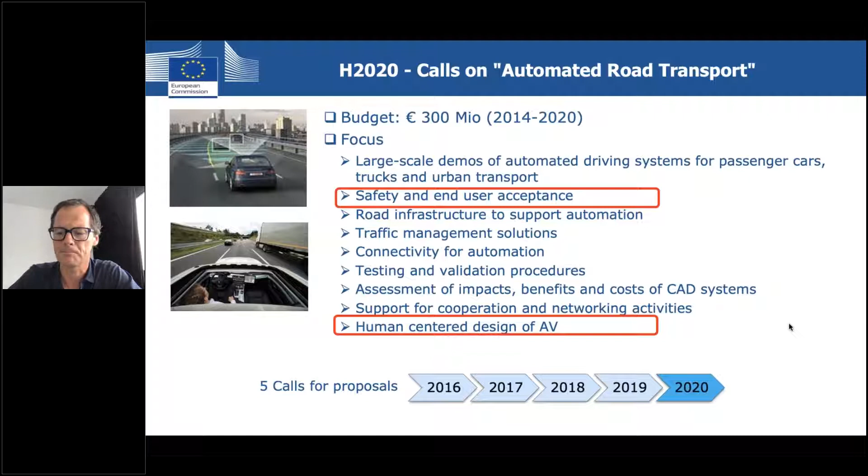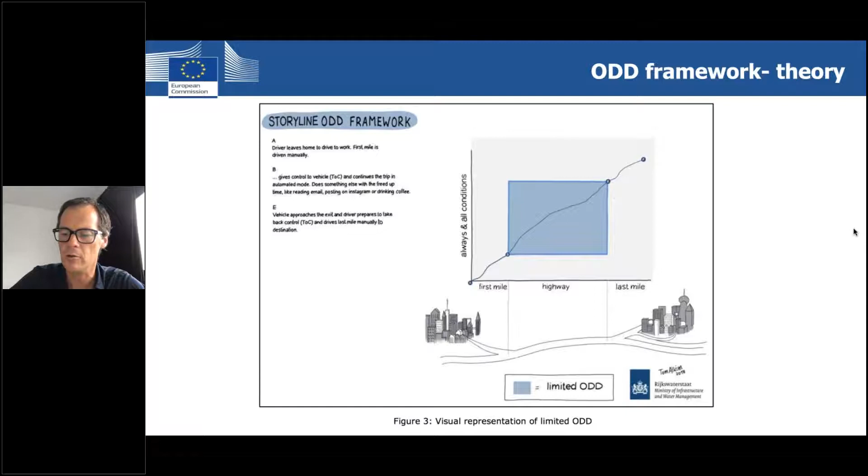Then at the end of the operational design domain, the driver takes over again and drives manually to its destination. Now of course this is very nice in theory, but we all know what happens in practice. I have many videos showing what can go wrong, and you must have experienced that yourself with testing. There are many instances in practice where things don't go as planned and the limits of the operational design domain are reached.

These are often related to infrastructure elements, to mixed traffic and other traffic on the road, and to adverse weather conditions, for instance. And I think it is a joint task for all the stakeholders to try and solve this in such a way that we try to optimize the operational design domain.

However, we cannot make all these gaps disappear. So we should also really focus on the transitions of control into and outside of the operational design domain. And I think if you look in relation to interACT, gaps related to dealing with other traffic is an important task. Another one is also the vehicle behavior when it is inside the operational design domain.

Because automated vehicles do behave quite differently from human-operated vehicles at the moment, at least that's how we envision this. And in the end, that should be a bit more harmonized. So I think we still have a long road ahead of us.

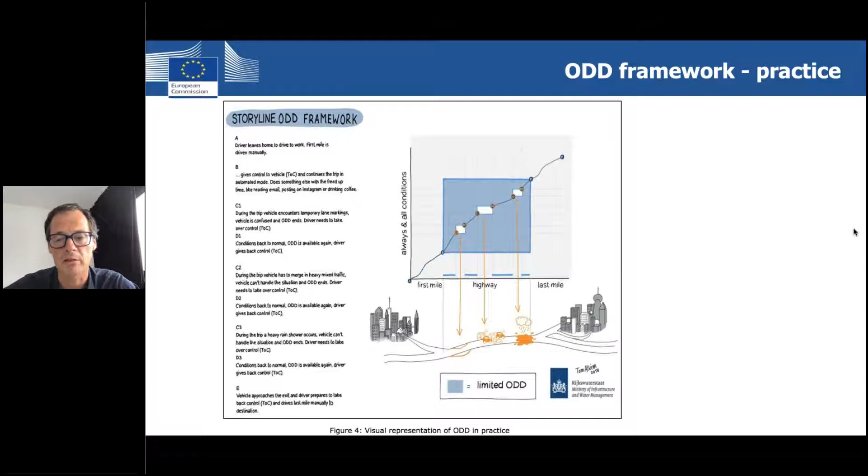I think you made some major steps in interACT, especially related to these mixed traffic challenges. And I would say that communication, whether it's implicit or explicit, really helps also in negotiating with other traffic and expanding the contextual awareness of automated vehicles. But I also think that for the coming years, we need much more research and developments in this phase.

So with that, I have come to the end of my presentation, and I don't know if there is time for some questions at the moment. I think I should - you have taken back control.

Good. Thank you, Tom. That was really nice to hear the European vision. And as a researcher, we are of course happy to hear that there's more research to do, I would say.

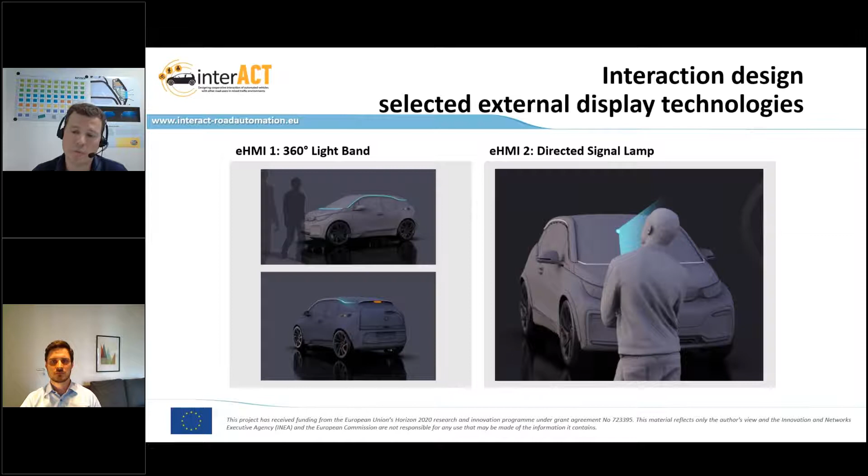The so-called directed signal lamp was a special research work and also a PhD work we did here at Hella, with the idea that we can send light signals to only one specific traffic participant. That's an interesting technical approach to realize a perception-based interaction strategy, just to send signals to the traffic participant to whom the message 'I have detected you' refers.

Going into detail regarding the 360-degree light band: one important thing was that we had a solution that fits the car body of the demonstrator vehicle. It was one of our main goals to have a fully integrated solution, and we reached this goal. We also dealt with a lot of technical questions about how this light band should look and what should be feasible.

One important question during the last years, not only in this project but also in other projects, consortia, and fora, was about the perfect light color, the color of choice. From month to month, year to year, we saw that something between blue and green is the color of choice. Sometimes you read the words cyan, blue-green, or turquoise as similar terms for the same color.

If you know the CIE color shoe, shown here on the right side, it's a small area, something between 490 and 500 nanometers we have to reach, to be out of the green and blue restricted areas. These areas are already restricted for vehicle and traffic lighting. So the idea is to get a saturated color in between these two colors, and that's something we have reached and implemented in this project.

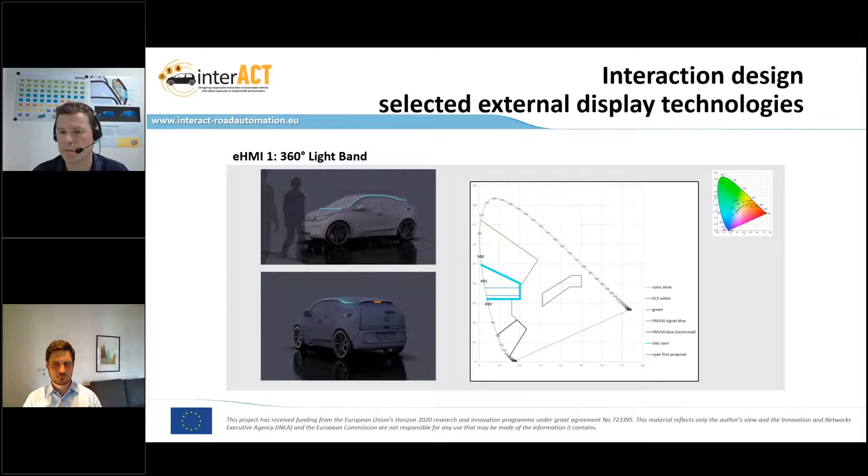One challenge, especially for this light band application, was to fit it into a vehicle's car body. We didn't build our own research platform; instead we took, as an example, a BMW i3S serial vehicle with a space frame structure. So we have the space frame as the bones of the vehicle, and the body parts on the outside as something like the skin.

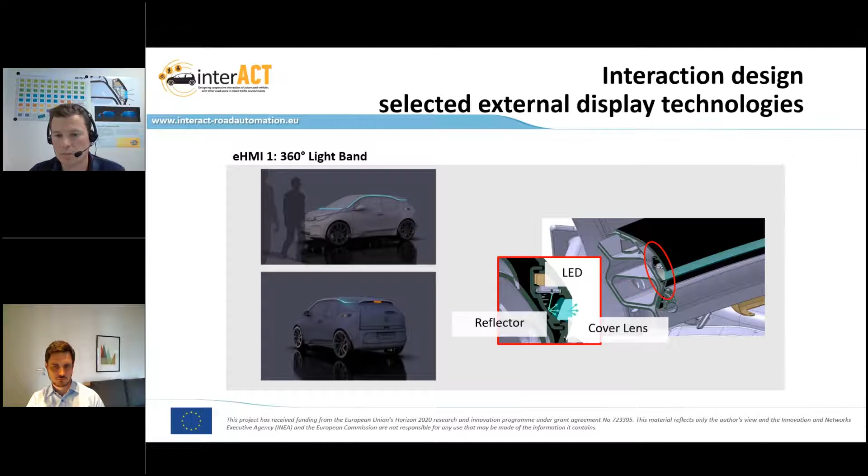It was a big challenge to implement this technology, because if you look at this center cut, you can see we have around 10 millimeters between the light source and the reflector, and 10 millimeters between the reflector and cover lens—quite a small system. We have more than 700 LEDs around the vehicle, all switchable individually, giving us the chance to realize animation and illuminate segments, while still achieving a very homogeneous appearance when all LEDs are switched on. This was one of the technical goals we wanted to reach, and we reached it in this project.

The other HMI component, a little more exotic one, is one of the main differences compared to other projects: this so-called directed signal lamp idea we implemented in the project. It's like a projector with a special liquid crystal display as an imaging device inside, light sources and reflectors for back illumination of this display device, and a multi-lens system to image this display.

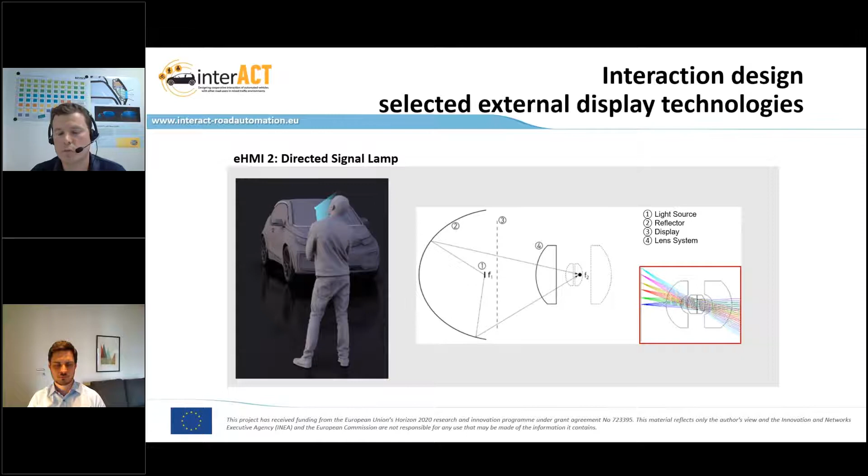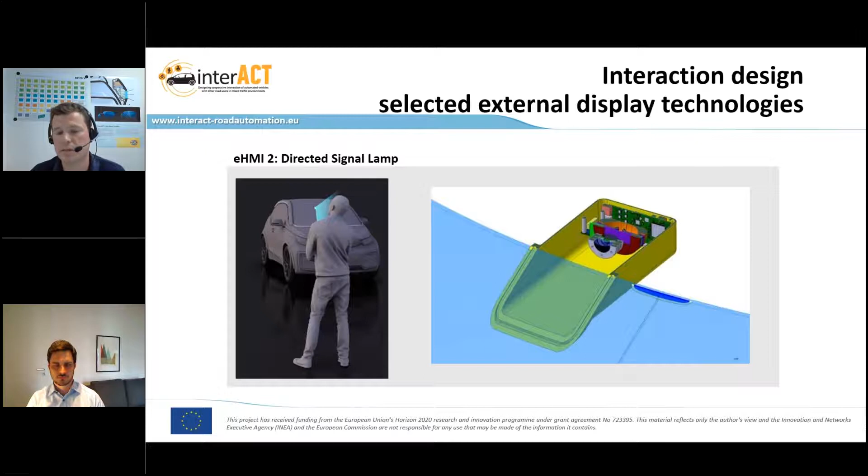The challenge is that we have 320 channels we want to realize in a horizontal range of around 70 degrees, to send light signals and coded messages like this to only one specific traffic participant. In one demonstrator vehicle, we also integrated one very first prototype of this directed signal lamp idea behind the windshield of the vehicle.

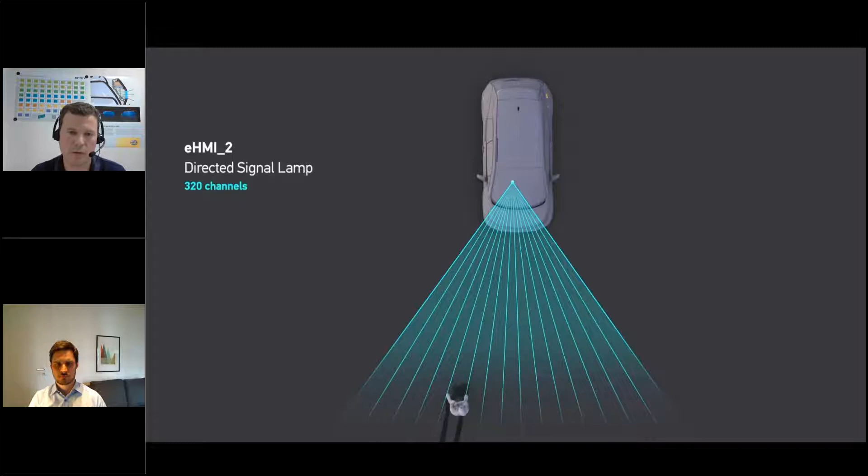This is just a small short animation to get an impression. This is a top view of how this signal lamp appears, how it looks, how it works. I already mentioned these 320 channels in 70 degrees, and it's also possible to address several addresses. This is a short video from our PhD student, Jan Wilroth.

Jan, I think you can hear us. Warm welcome.

Made with this smartphone, it's just a 3-second video in endless repetition, but you see this very first desktop sample we built up here at Hella on the desk. One of these 320 channels is open now, and the back illumination is on. You see when you make a step left, you see a light signal; when you make a step right, you don't see a light signal. It's a more or less simple idea behind it, but it's a technical challenge to solve this issue, you can be sure.

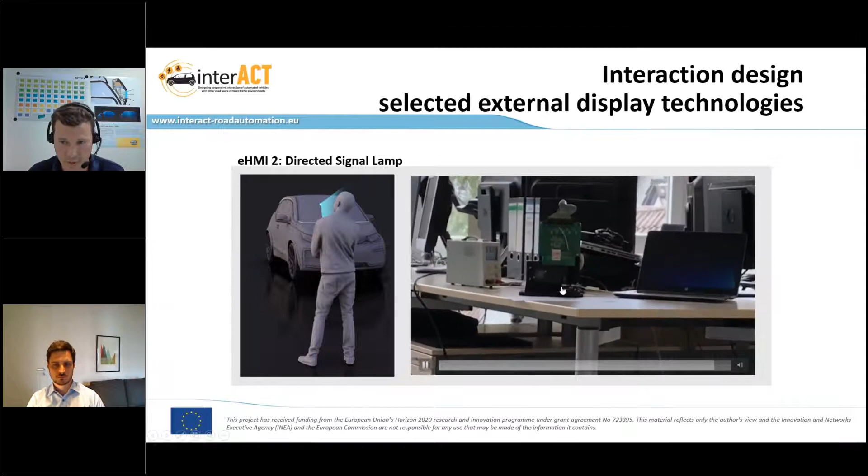Okay, then for the onboard users, there were also some investigations. You will hear more about that in the evaluation presentations later on. I just want to give you a short hint that we didn't forget the onboard user, and we also had two so-called IHMI, internal HMI solutions, built up for this project.

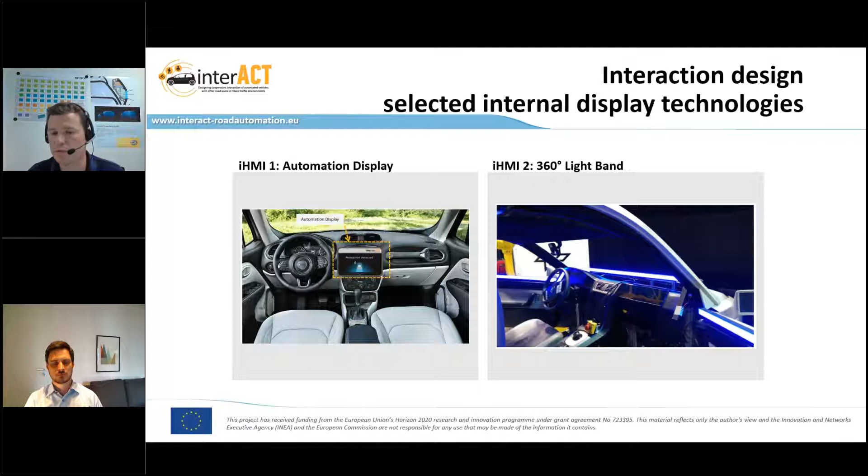One is a so-called automation display, which is able to send messages or to mirror messages that are sent to other road users, also to the interested onboard user in special cases. On the other hand, this is a mock-up, a laboratory mock-up from the DLR with a so-called 360 degree light band for internal use, where it's also possible to illuminate this light band in different colors and different segments, to give the onboard user a hint, for example, if an object was detected and in which direction, and so on.

Okay, then I want to hand over once more to my colleague Florian, who tells you something about, or gives you an overview of, this signal design.

Okay, thank you. So before, I was telling you a little bit about the more abstract interaction design we developed. Now Mark told us how we selected the appropriate technology to actually transmit these messages. So the step that's still missing is how the signals actually look on the HMI. Basically, once again, we have a look at these flow charts here.

We developed different signal variants, for instance, for the message that the AV gives way. One example: we have the light band switched on, and once the AV wants to communicate that it gives way to another traffic participant, the light band slowly disappears from the front to the back. Or we also developed a variant where the light band slowly turns off, or a further variant where the light band pulses slowly.

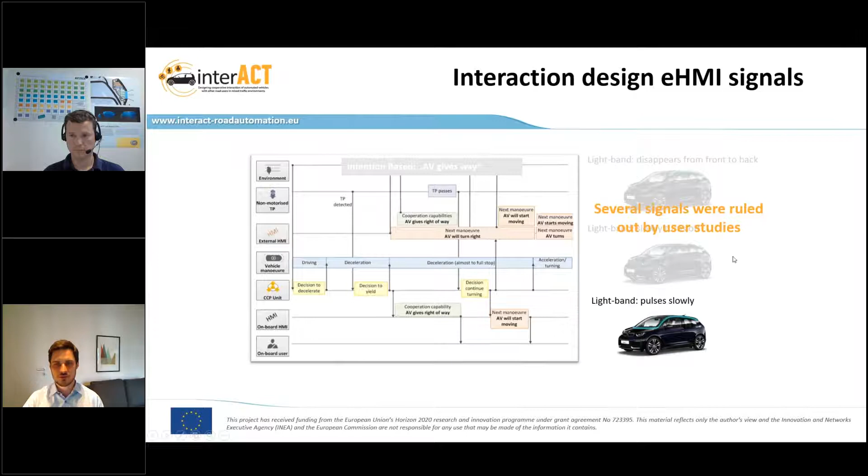And throughout the project, I don't want to go into detail about the evaluation because we will hear later a talk by Yee Mun, we ran studies to design in an iterative way and also rule out a few signals through these user studies.

So in the end, I told you before we had these three design strategies. In the end, we came up with one design per interaction strategy, so we still had one design for the intention-based, one for the perception-based, and one for the combined. I will show you a quick overview of this in a second.

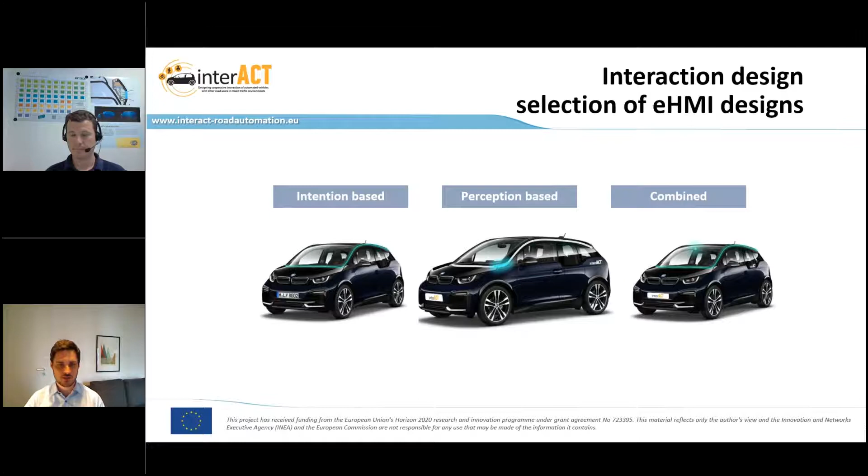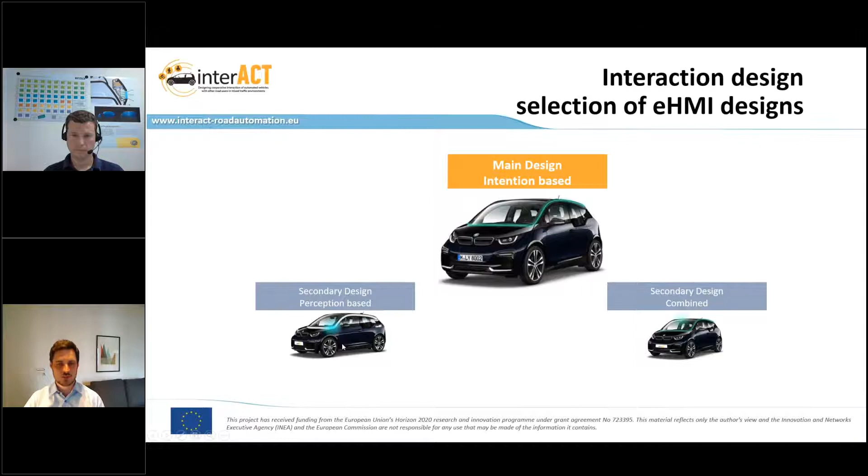What we tried to do at first was to come up with one single design for interaction, but we found there was so much potential in all three interaction strategies that we decided to prioritize and come up with one main design that was included in all the evaluation studies that worked with EHMI, and then we had two secondary designs, the perception-based one and the combined one.

So basically, just to mention the flowcharts again, we are also able to use the flowcharts to describe the concrete signals here. We also have a signal catalog where all these signals are described in detail, such as their frequencies and things like these.

If there's any more information needed, please refer to our deliverable 4.2, where there's a lot more information on that. So I want to go quickly into the designs.

First we see the intention signaling design. We have the vehicle standing still, and then it starts moving or will start moving. We see rapid flashing on the light band. Once the vehicle decides that it gives way, we see a very slow pulsing. Then the vehicle actually decelerates, and we see that the pedestrian in this case can pass. Now he passes.

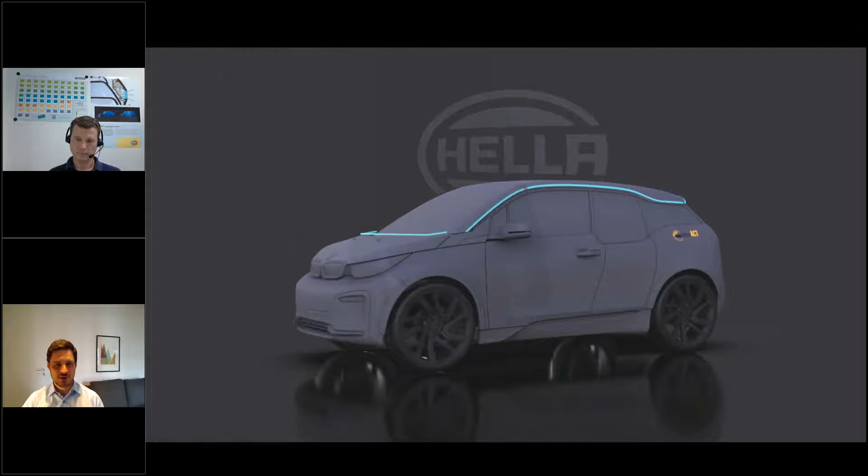If we look at the perception signaling design, the final design that was implemented, we have a part of the light band which transmits the signal that the AV has detected you, or in this case, the pedestrian. As we have the 360-degree light band, the signal can go all around the vehicle and can point towards any addressed traffic participant that we want to highlight, to show that he has been detected. We will see that hopefully in a second with a pedestrian walking by.

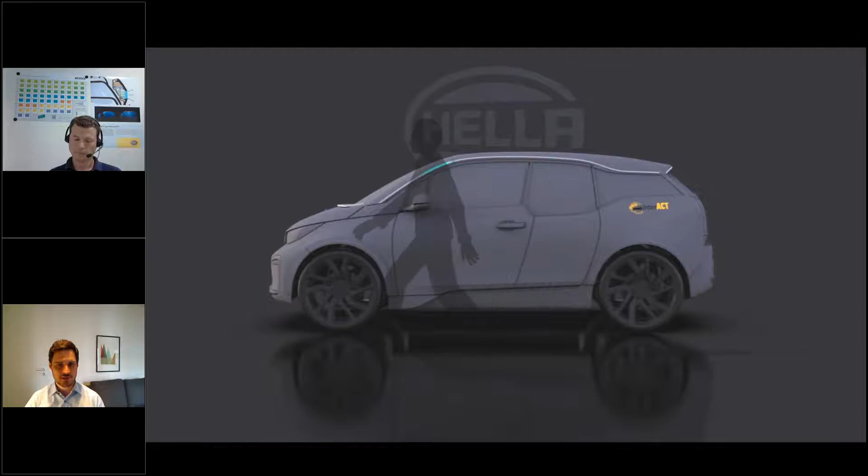If we look at the combined design, we don't have an animation video of the actual combined design. There we combined the intention signaling design you've just seen with the directed signal lamp that Mark described before. I want to go into the message that the AV has detected you on the directed signal lamp. If you have been detected, you will be able to see the signal in the windscreen that you can see now. And if another pedestrian should be addressed because only he was detected and you weren't, for instance, then you will just not see the signal, but the other pedestrian will.

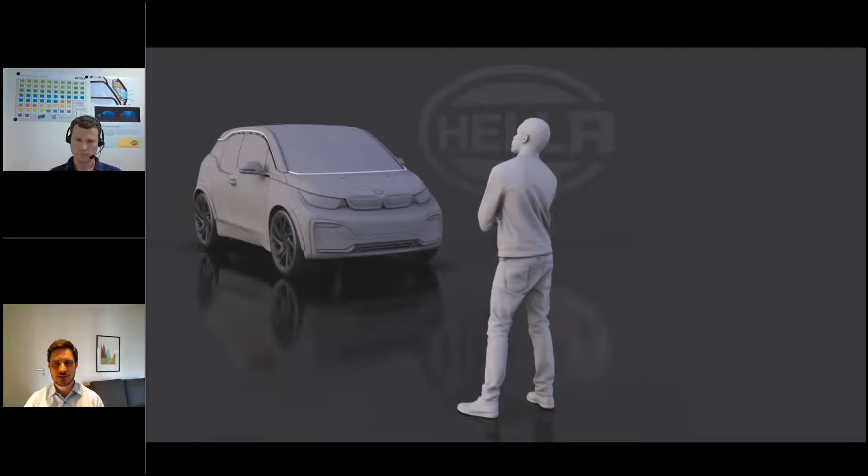All right, and then I think we're ready to implement everything into our demonstrator vehicle, and I hand back to Mark.

Okay, thank you Florian. Just the last 3 slides, we should give a short overview and a fluent transition to the next presentation regarding integration of the overall system, here with a focus on the HMI components. This is just a collection of pictures we made during the last 3 years, from a first idea, from a sketch, how anything can look like, and which messages can be transferred by which technology and so on.

Then we had some workshops on how these eHMI components can be mounted on the vehicle and what's necessary to realize a full integration. Of course, CAD data, so mechanical design was one main point to get a technical solution for sure.

Then we built up, on the one hand, our first desktop sample to get an impression of how these technologies work, and on the other hand we have a virtual reality implementation to make first investigations with VR glasses or whatever.

And then all results were put together to build up both external HMI components, the light band and directed signal lamp, and then the integration work here, in this case in the tool shop or the garage of BMW, could start. And we had also a second vehicle, so colleague Fabio Tango will tell you more about this in the next presentation.

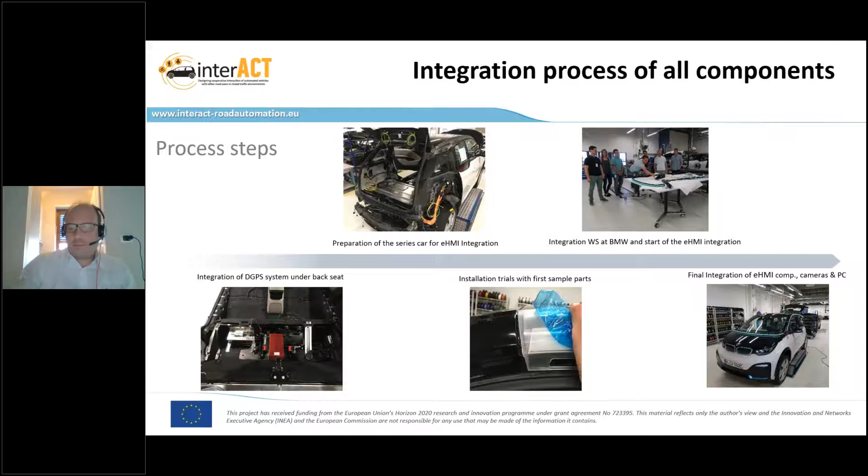This is the same, but from the internal part, and you can see the passenger compartment with the eHMI control panel, the front camera I mentioned before. The DGPS is located under the back seat, and you can see also the seat cover for the human driver when BMW applied the Wizard of Oz technique for the evaluation. We heard more details about this during the Work Package 6 presentation.

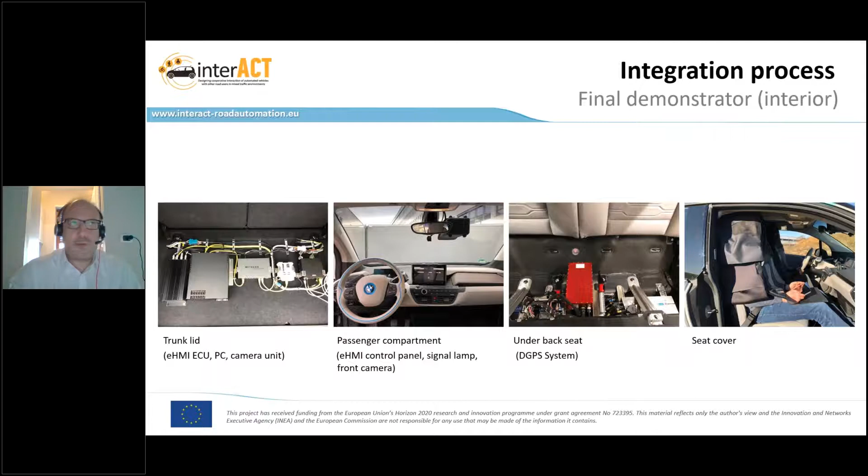Which is the testing process now? Basically, the testing process of the BMW demonstrators is divided into two sections: the component verification and the system verification. For the component verification, we have the test and validation of the single component before starting the integration.

The first one is done directly in the BMW body shop, under controlled environmental conditions, in lab conditions. When this subphase is positive, the test of the entire system is repeated outside, under real environment conditions, on the specific test site. So this was the process for the BMW car.

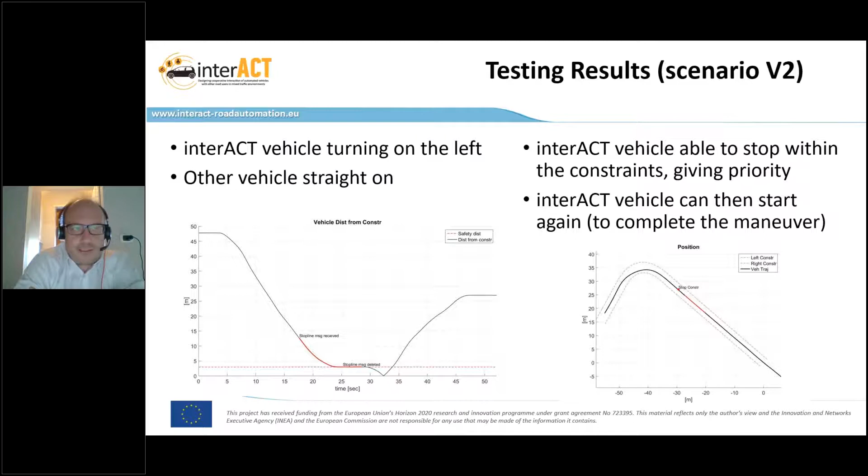Even more interesting is the second scenario, where the interact vehicle turns left while the other vehicle travels straight on. Here, the strategy provided by the CPU is to stop, giving way to the other vehicle, then start again to complete the maneuver. As you can see from the plot, the vehicle stops within the constraints provided by the CPU, and once the other vehicle has passed, it starts again to complete the maneuver. Again, the trajectory stays perfectly within the left and right borders.

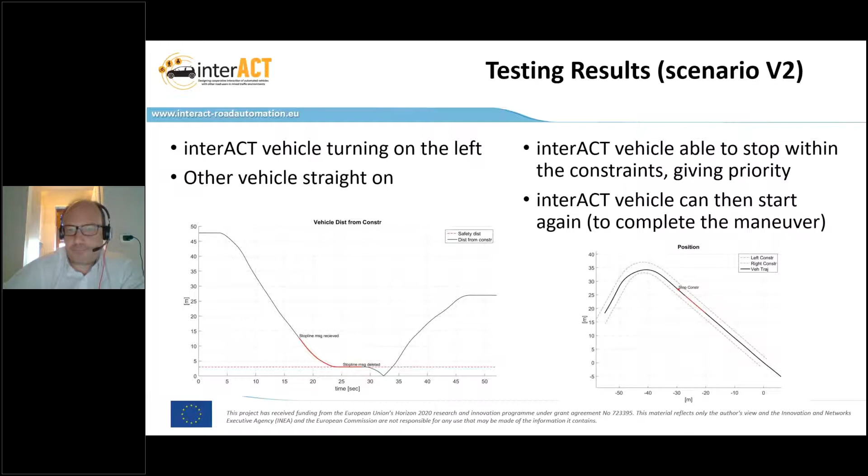So now, the conclusions we want to provide. First, a summary. The main results of these integration activities were two: interact demonstrators ready for evaluation in the next presentation, and interact solutions evaluated, integrated, and demonstrated. As Anna said at the beginning, unfortunately we couldn't provide a live demo of the vehicles originally planned for the final physical event in April.

Which are the lessons learned? What key points should we take into account for future activities? As you've seen and heard, the integration work has been quite hard, requiring several workshops for both BMW and CRF, as it's a huge activity. So from this perspective, we need to take into account certain points.

High precision digital maps and positioning are needed, especially for trajectory planning. For example, think about a classical vehicle movement in a parking lot: you are traveling to search for a parking space and meet another vehicle in the opposite direction on a very narrow road. It's clear you need to be very accurate in trajectory planning.

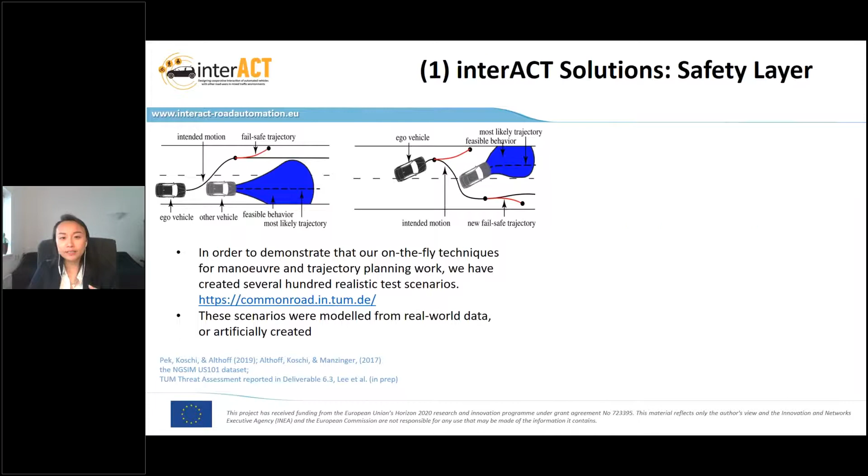We use the threat assessment method, which tries to understand and evaluate the objective safety of the proposed fail-safe trajectory approach. We also investigate the objective criticality of the scenario using the time-to-react measure, as well as subjective criticality—how people felt in all these situations.

The key takeaway is that random simulations of the behaviors of other traffic participants confirmed the proposed safety benefits of fail-safe trajectories in all simulations. All the automated vehicles remained collision-free and safely came to a standstill, which is very good news. These fail-safe maneuvers ensure the availability of safe actions even if vulnerable road users behave unexpectedly.

Moving to the internal HMI, as you remember, we have an internal HMI which provides information to the onboard driver about what the vehicle is able to detect outside. We've conducted a driving simulator study to investigate this.

In this study, we investigated conditions where the IHMI information is present and sometimes not present, and we also had participants do a secondary task or no secondary task. This is the kind of information shown on the IHMI.

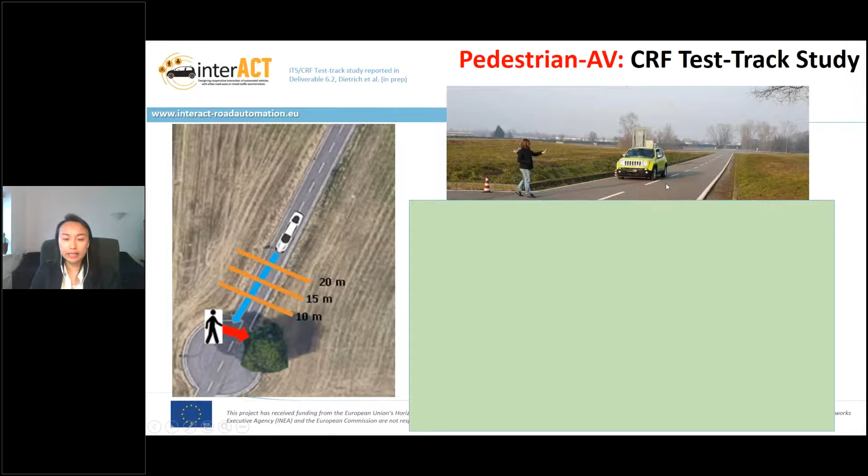Going next to talk about the method we use to evaluate the prototype: our CRF demonstrator, where we conducted a test track study using the CRF vehicle on pedestrian and AV interaction. The pedestrian stands at the edge of the road with hands up, reacting to our stimuli, the approaching CRF demonstrator. What we manipulated is the distance at which pedestrians are able to see the approaching vehicle.

And the eHMI design - whether it's conditions with no eHMI, or whether it is directed light band, or whether it is slow pulsing light band.

What we get participants to do is, for example, in one block, raise their hand if deceleration is perceived, raise their hand if eHMI is perceived, and raise their hand if they decide to cross at that moment. We also get them to rate confidence levels as well as the safety level at each of these trials.

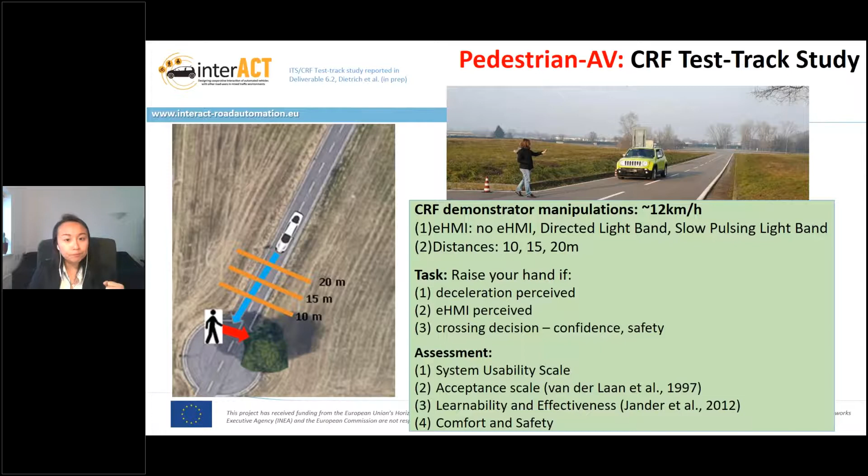We also provided some subjective evaluations, for example the system usability scale, the acceptance scales, learnability, effectiveness, comfort, and safety. So let me provide you a video of how it looks like.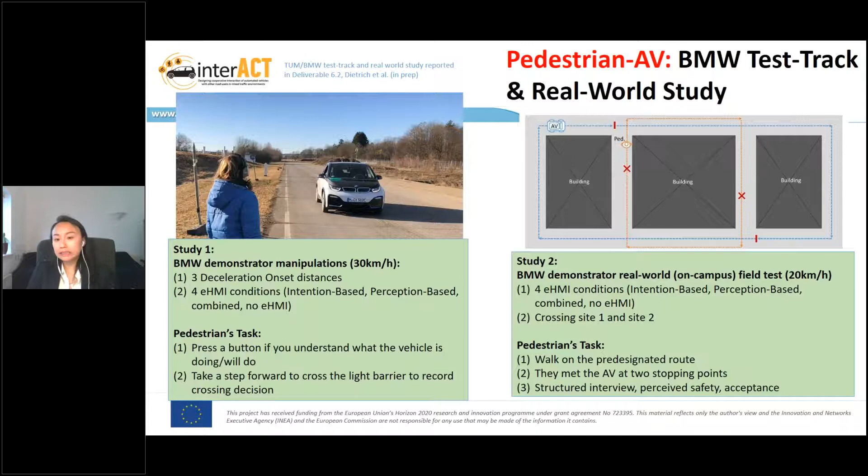What we did is also manipulate different eHMI conditions, as well as use two different crossing sites. Pedestrians' task was again to walk on the pre-designated route, and they met the AV at two stopping points, and we conducted structured interviews evaluating the perceived safety as well as acceptance.

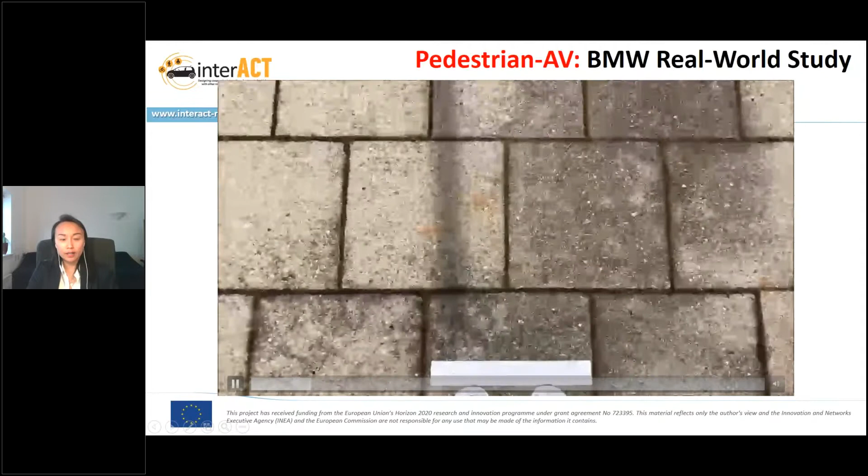Next, I'm going to show you a video of how it looks from the pedestrian's viewpoint. The pedestrian will have to walk in the route designed for them and encounter an approaching BMW demonstrator. As you can see, the eHMI partially lights up and is also following our pedestrian - that is the directed light band.

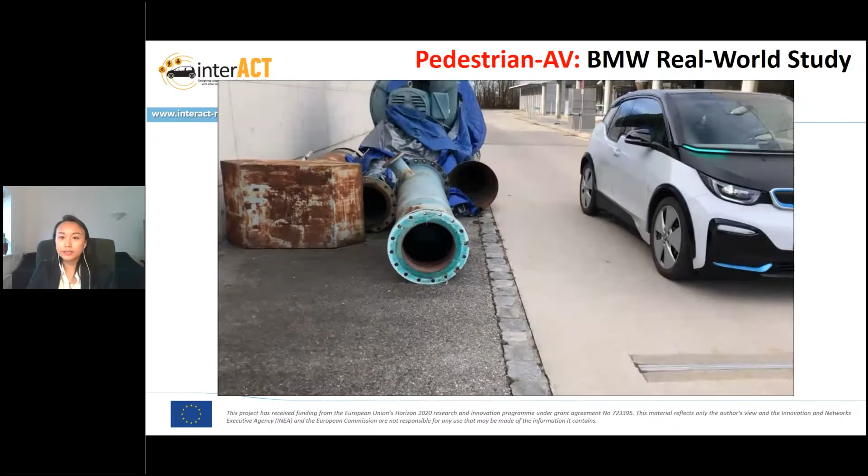Going to the next slide. So what I'm going to do now is provide you some of the findings. It is some of the findings, not all the findings, and what we know by now.

So in pedestrian-AV interaction studies, the first question is visibility of eHMI. Which signal is more visible? Even though they are all perceivable, some signals are more visible than others. What I mean by more visible is that people are able to see the eHMI at a further distance, or they rated that the eHMI is more visible than the other ones.

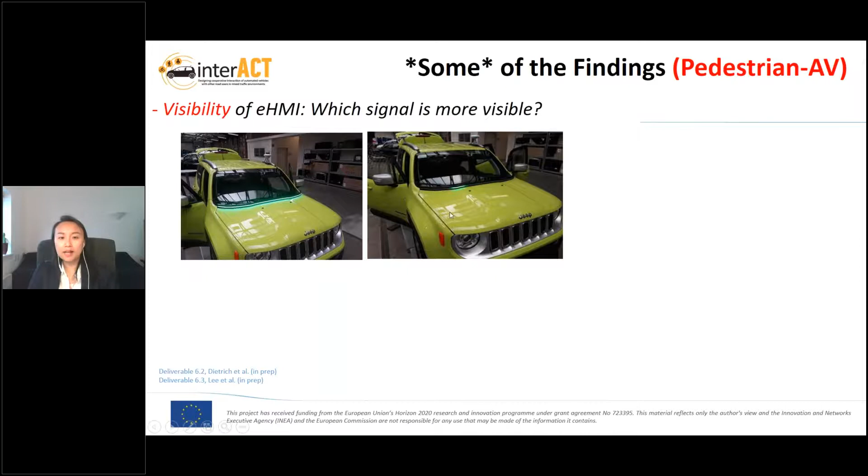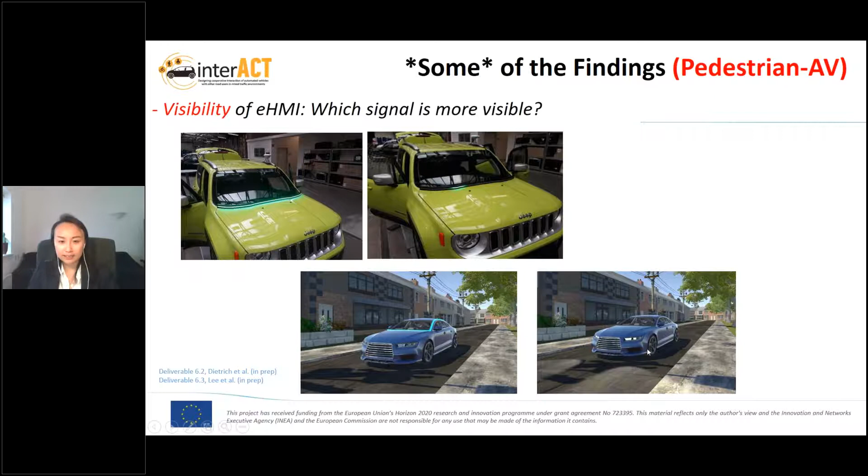In our CRF test track study, we found that the visibility of this, the partially lit up light band, is more visible than the other one. And in our pedestrian simulator studies, we also found that the typical flashing headlights is more visible than our slow pulsing light band.

In some situations, we also have pedestrians or participants who mentioned they were not able to see the eHMI. That's probably under very bright sunlight, or there are some situations where people will not be able to see it, but not all. So this is not to tell you whether one is better than the other. By using a simulator to test visibility, you will only be able to compare one design to another, which is very limited to the simulator environment, and very different from whether people are able to see the eHMI outdoors, which has a totally different environment.

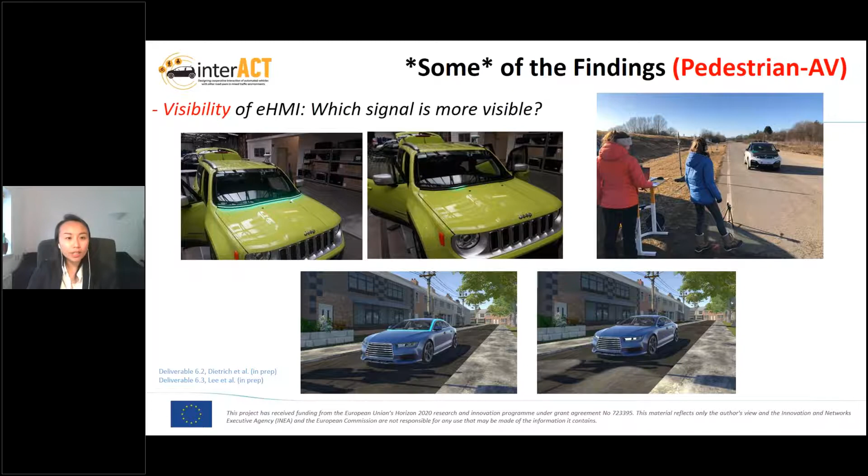Why visibility is important is because if people are not able to perceive the eHMI at the point when it is intended to be perceived, when the information is provided to other road users, then there will be a delay in terms of people's responses. Therefore, it is a very important topic, the visibility of eHMI.

Anyway, what we found is that the presence of eHMI does reduce the crossing initiation time. So people do cross earlier because of the presence of eHMI.

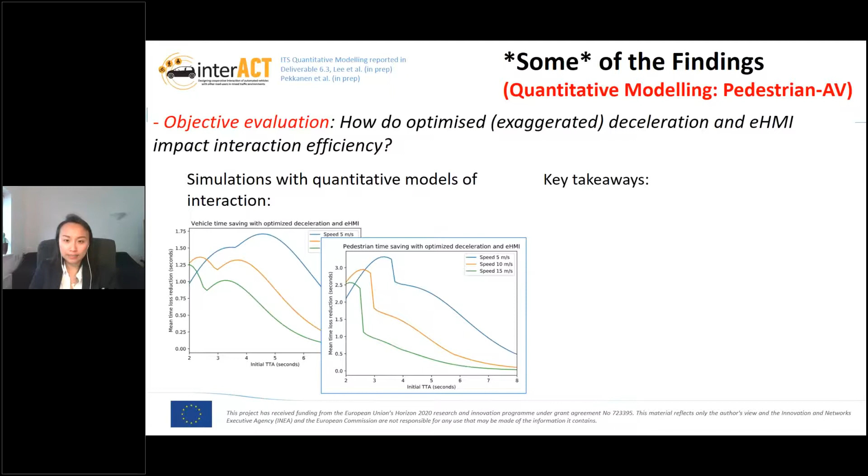The key takeaways are that both the optimized deceleration and the eHMI save time, up to about 1.5 seconds for the AV, and up to about 3 seconds for pedestrians, in terms of time saved per average interaction.

With the eHMI, the optimal deceleration is then milder, meaning the deceleration of the vehicle does not have to be as exaggerated, and there are greater time savings in situations with larger safety margins.

We also conducted cross-cultural comparisons between Japanese and UK road users, and found that UK road users have a smaller safety margin, such as in driver turning situations or pedestrian crossing situations, where the safety margins are then lower. Therefore, the greatest time saving happens with the larger safety margin.

And what about subjective evaluation? We've been talking about people crossing earlier, shorter interactions, and higher gap acceptance - but do people actually like it? Do people accept it? Generally, pedestrians felt very safe and comfortable interacting with the AV with an eHMI in our CRF demonstrator vehicle.

eHMIs were generally well received with high ratings of usability, acceptance, and learnability from both the pedestrians' and the driver's perspective. So that's good to know.

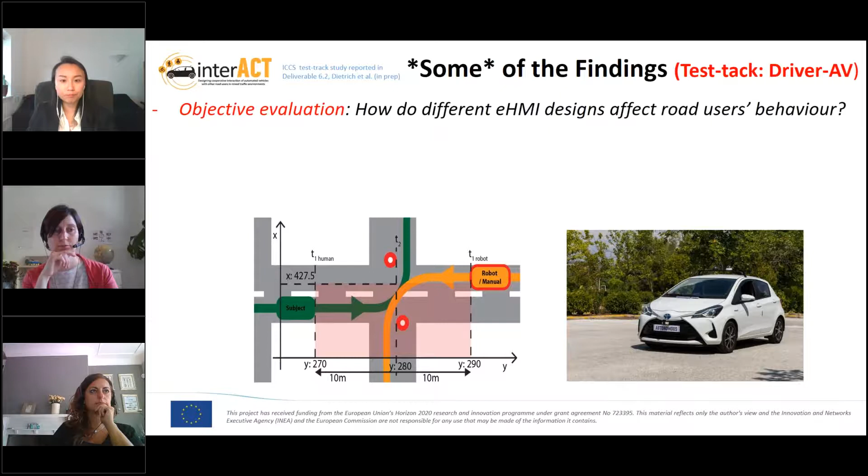Okay, thanks. Okay, thank you. So there's a question about which side of the road is important, and I think the general answer is no, there is not any difference, as long as people know which side of the road to look at. So in all our studies, we made sure that the pedestrians and the road users were resident in that country for a while, so they didn't get confused about which side of the road to look on.

There's a question about distracted drivers. I don't think we looked at distracted pedestrians in interACT, but we are looking at that actually in Leeds with a current study.

Big question to the whole consortium: whether or not we would recommend EHMI for AVs, yes or no. I don't know if anyone wants to jump in and answer that.

I think at this point, before saying whether we recommend or not, we really do need more information than we currently have to answer that question. As mentioned in the conclusion, there are a lot of other scenarios we have not tested yet, and there's still a lot of investigation needed in terms of whether people can see it, what about distracted people, what about long-term effects, whether one scenario is definitely needed compared to others, and whether there could be negative effects we haven't found yet. So all this information is really important for us to gather before we can make a recommendation on whether EHMI is needed or wanted. These are, at the moment, based on the very small amount of studies we've laid out, the current findings that we have.